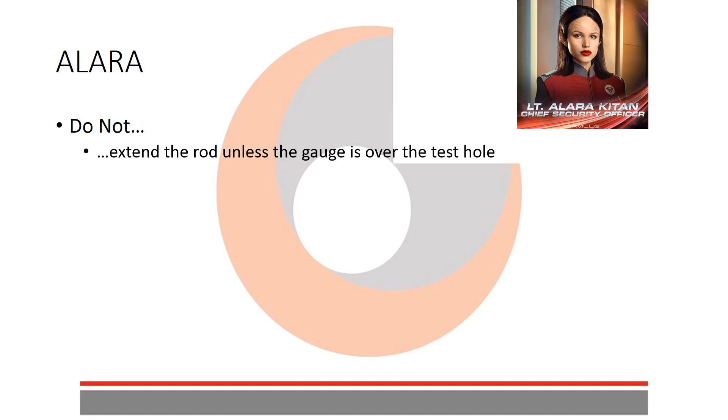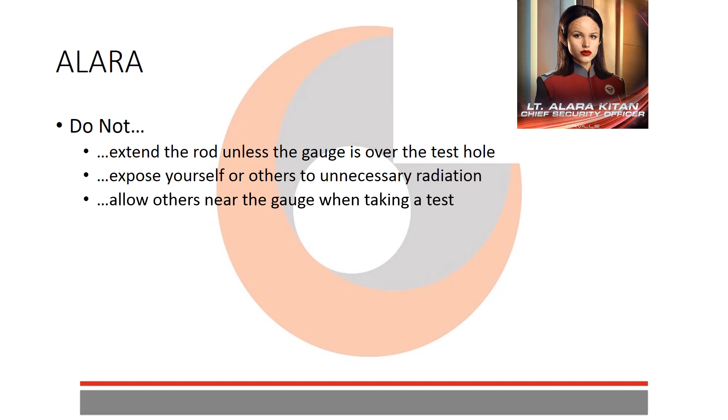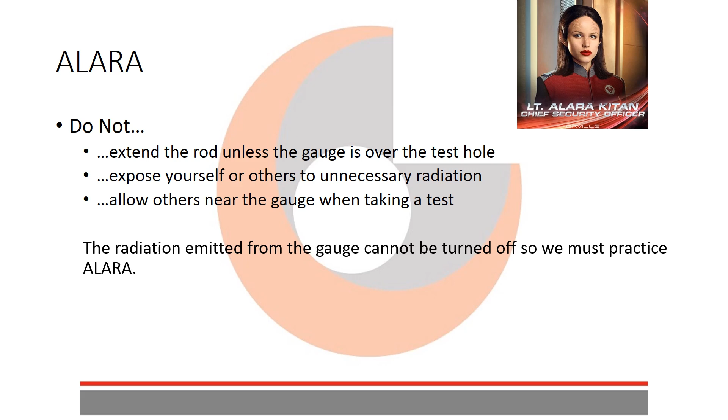Keeping in mind the concepts of ALARA, things you do not want to do are extend the rod unless the gauge is over the test hole. We don't want the rod outside the shielded area unless it's going directly into the ground. You do not want to expose yourself or others to unnecessary radiation, and you do not want to allow others near the gauge when taking a test. The radiation emitted from a gauge cannot be turned off, so we must practice ALARA. The best we can do is to keep the rod inside the gauge at all times when it's not actually taking a test. Again, ALARA has to do with time, distance, and shielding.

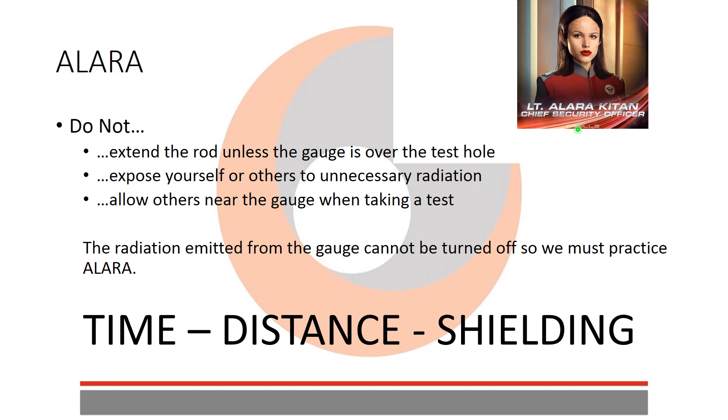Those of you familiar with the Orville television show, it's a picture of Lieutenant Alara Kitan, Chief Security Officer on the Orville.

Time. The less time a person remains in the area of radiation, the lower the radiation dose that person will receive. Work should be carried out quickly and efficiently, but with attention to safety.

Distance. The intensity of radiation and its effects fall off sharply as you move further away from the radioactive source. The dose rate decreases as the inverse square of the distance from the source. For example, by moving twice as far away from a radioactive source, you're exposed to only 1/4 the amount of radiation. Moving 3 times as far away means 1/9, and so on.

For instance, let's compare background radiation from cosmic radiation levels. At sea level, you'll receive about 30 millirems per year from cosmic radiation, and at 10,000 feet altitude, you'll receive approximately 140 millirems per year.

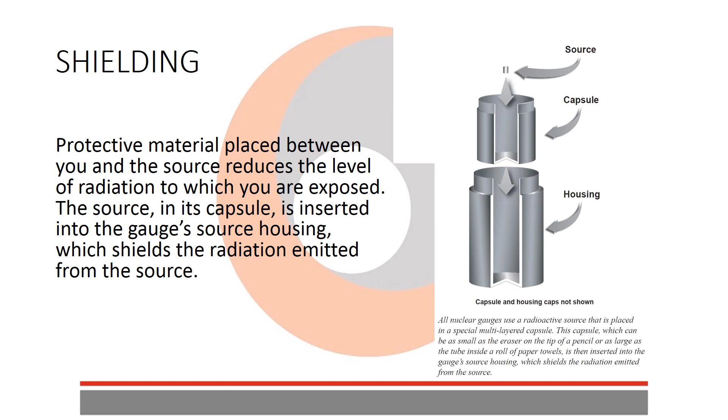Shielding. Shielding is a protective material placed between you and the source that reduces the level of radiation to which you are exposed. The source, in its capsule, is inserted into the gauge source housing, which shields the radiation emitted from the source. So you've got this little tiny source pellet, and it's put inside this capsule, and then the capsule is placed inside this housing, and that housing is actually welded to the end of the tip of the rod for the source that comes out of the gauge, and it's inside the housing for the source that stays inside the gauge.

Some sources of radiation, as we've already talked about, are solar radiation, nuclear medicine, and X-rays, of course. There are cosmic rays, which contribute to radiation. Radon is another contributor to radiation. Actually, as humans, we give off a small amount of radiation. Other sources of radiation are nuclear power plants, different types of foods and drinks. There's terrestrial radiation, radioactive waste, and a variety of consumer products can all be considered radioactive sources.

Let's talk about radiation dose limits. The general public is allowed 100 millirems per year over background. Once they are trained through the 8-hour course that Troxler gives, or APNGA, or Bruce Peterson, or something similar, then they are allowed 5,000 millirems per year. And you, as an adult radiation worker, are allowed 5,000 millirems per year. Minor radiation workers are allowed 500 millirems per year, as well as a fetus is also allowed 500 millirems per gestation period. So if a woman becomes pregnant, that fetus is allowed up to 500 millirems during that gestation period.

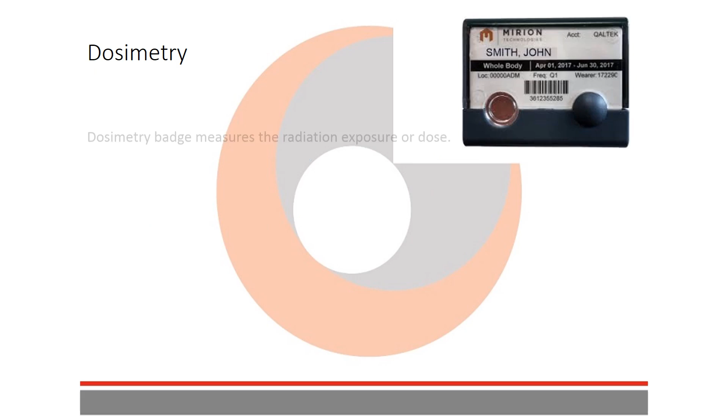Dosimetry badges. Up here in the top right hand corner, we've got a photograph of a dosimetry badge. It's from QALTEK, which is where we're getting ours currently, and they get these from Mirion. So the dosimetry badge measures the radiation exposure or dose.

There will be quarterly dose reports posted near the gauge storage area or another place designated by your local RSO. We keep ours right on the door to the gauge storage facility. The report shows the dose for the previous quarter as well as the annual to date and your lifetime exposure.

If you're ever going to leave MTI, you should request a lifetime dosage report so that you can provide that to your next employer if you're going to be working around radiation. And if you're new to MTI, you should be bringing one of these with you if you have previously worked around radiation.

MTI requires that your badge be worn at all times when transporting, working on, working around, or using a nuclear density gauge. Only wear the badge assigned to you by the local RSO, don't wear somebody else's badge, because if it comes back showing an overexposure, we won't know which person that overexposure belongs to.

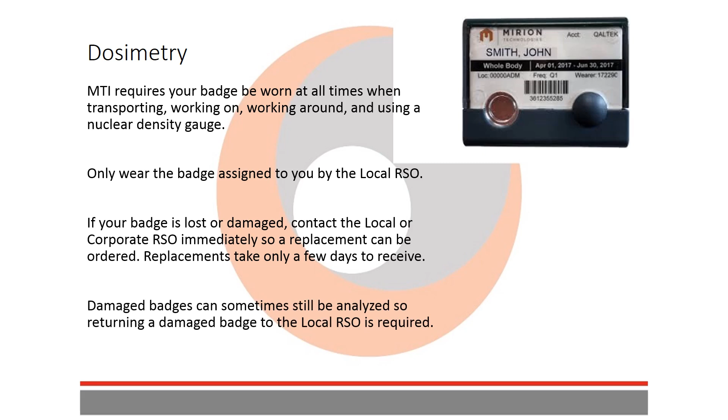While you're wearing it, you don't want to stop near any electromagnetic or radiation emitting sources, of course excluding nuclear density gauges, because that's what we're there to check. And you also don't want to wear them into a medical or dental facility because they could be doing x-rays, and that will affect the exposure.

Lastly, you don't want to leave it on the dashboard of your vehicle. A lot of times that extreme heat can cause some really bizarre readings on those. We've seen them come back extremely high because of that. So don't leave those on the dashboard of your vehicle, or really anywhere where it's going to be getting really hot or in the sun for an extended period of time.

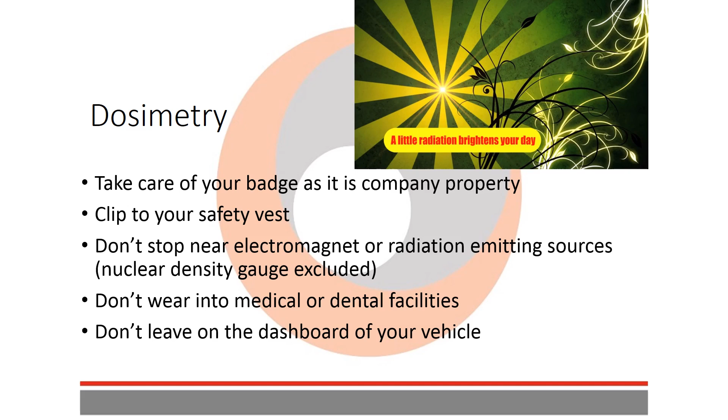More on dosimetry. We've got radioactive man over here on the right. In the case that a badge shows an overexposure, the local RSO is going to interview the gauge user, and together they will fill out a report indicating how that overexposure occurred.

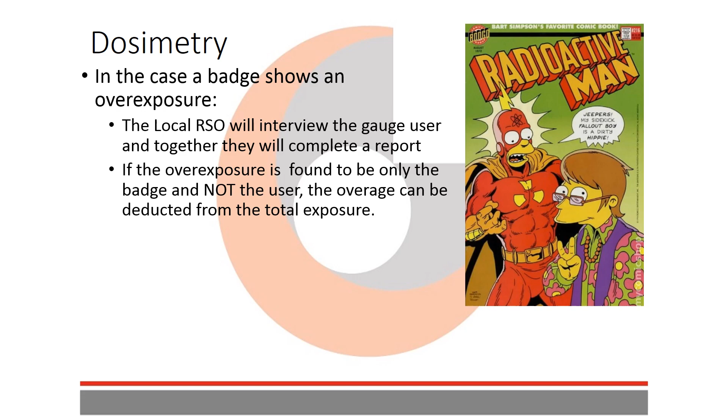If the overexposure is found to be only the badge and not necessarily the user, that overage can be deducted from your total exposure. As a trained radiation worker, you're allowed 5,000 millirems per year. It is possible the overexposure can result in an annual or lifetime dose being exceeded. In that case, the user may not work around radiation any longer.

One quick story about the previous bullet item. George DuPont used to tell this story. It's sort of legend now, but a guy was going on an extended leave. He was going to be gone about a month. As he's putting his gauge away for the last time, his badge comes off of his shirt and falls into the case.

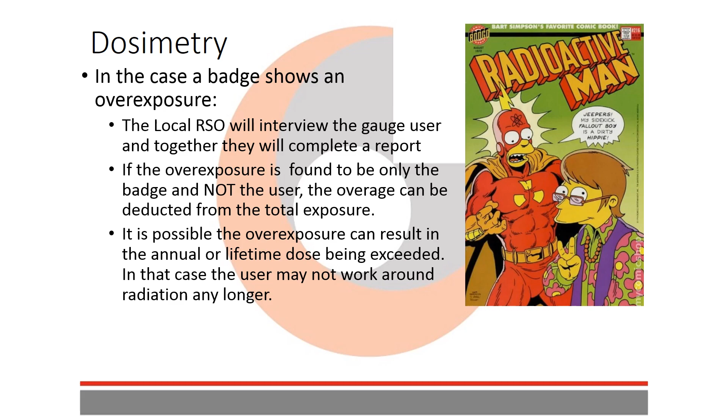It's stored in the case for about a month until he comes back, goes back to work, and lo and behold, he finds his badge in the case. It's been in there for a month, and it was highly overexposed, and they were able to figure out that that was the case. They wrote a letter to Mirion and had the majority of that exposure deducted from his annual and his lifetime dose.

Gauge storage, transportation, and use. Got some more radioactive man over here on the right. Transportation, use, and storage. MTI requirements are radiation safety training certificate from an approved source like APNGA, Troxler, or BHP.

I think the one that we like the most is Troxler. I feel like they give the best training for the amount of time that's spent there. And BHP is Bruce Peterson. I don't know if he's giving classes anymore or not, but that is possible.

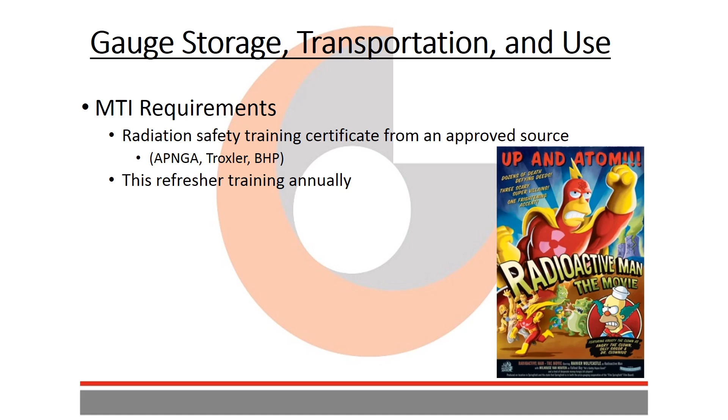MTI also requires that you go through this refresher training annually. So next year you'll get to watch this approximately 1 hour video again.

You have to complete the hazmat test annually. The requirement from the DOT is that it's done every 3 years, but because that time frame is difficult to track, we just do it annually. It's a quick and fairly easy test—I'd actually call it more of a quiz.

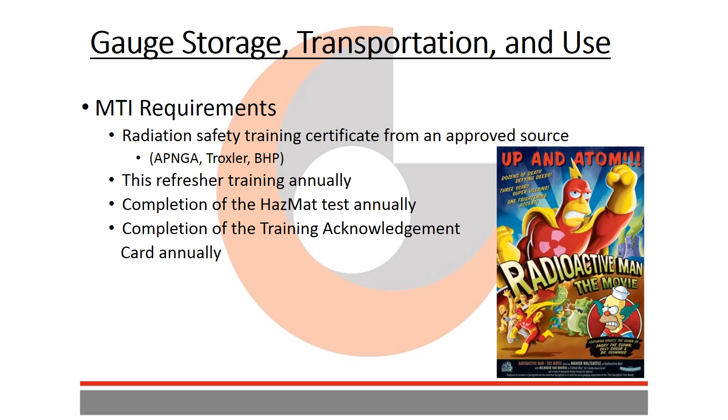You'll fill out a training acknowledgement card that essentially says you agree that you've been trained, taken a test, been through this refresher training, and know all there is to know about radiation. You will also need a gauge operator wallet card, which we now issue via email as a PDF, so instead of printing it and keeping it in your wallet, those of you using an iPad in the field can just keep it there in case someone asks to see it.

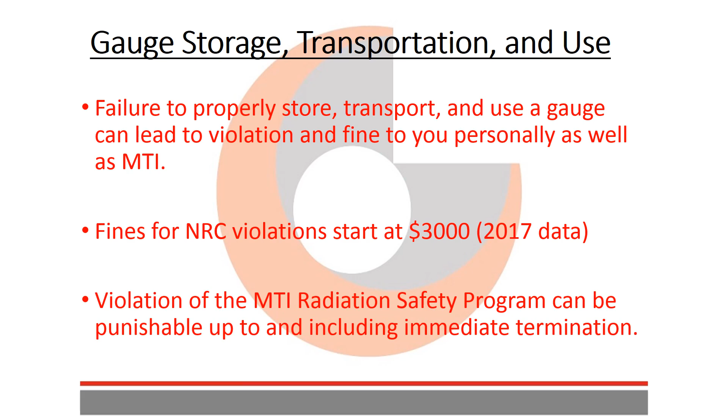Failure to properly store, transport, and use a gauge can lead to violation and fines to you personally as well as to MTI. Fines for NRC violations start at $3,000 as of 2017 data. Violation of the MTI radiation safety program can be punishable up to and including immediate termination.

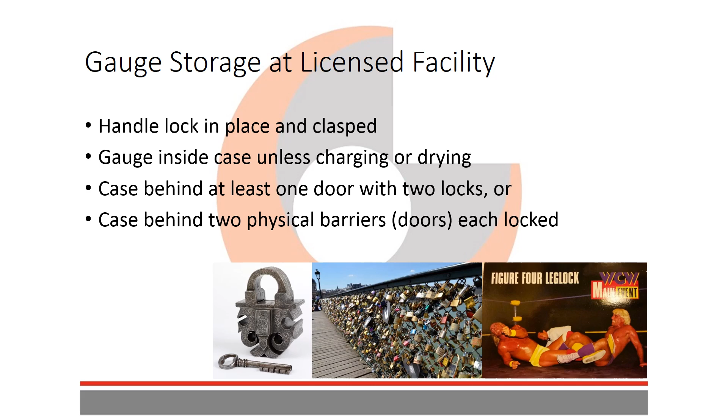The gauge must be inside the case unless it's charging or drying. The case needs to be behind at least one door with 2 locks, or behind 2 physical barriers, such as doors, each locked independently. MTI also has continuous recording cameras at each licensed facility to monitor in case of theft.

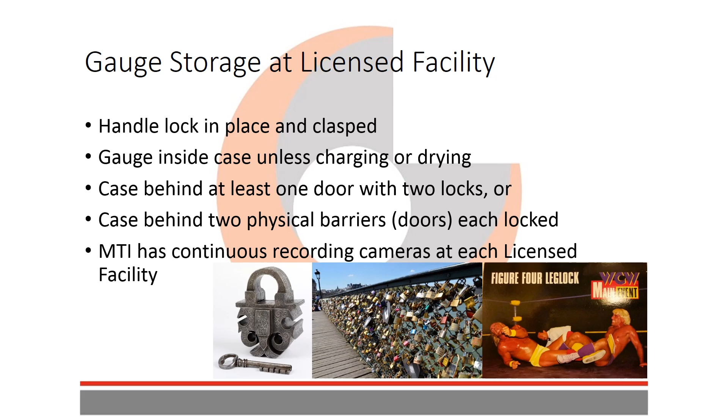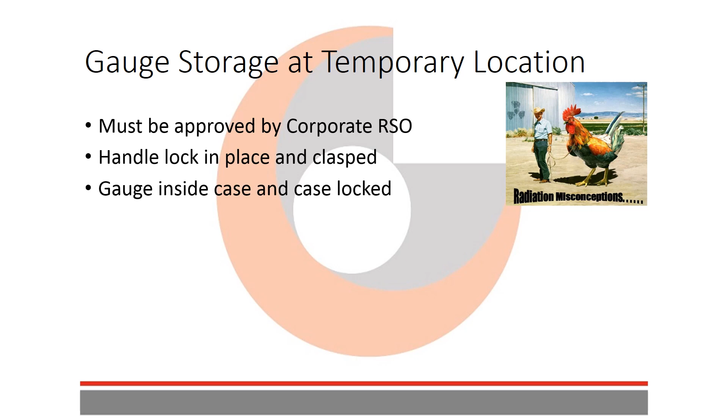Storing a gauge at a temporary location must be approved by the corporate RSO. The handle lock must be in place and clasped, and the gauge must be inside the case with the case locked. The case needs to be stored inside a locked or secured building, or inside a non-portable container such as a land-sea container—also known as a connex—or a job box chained to the axle of the job trailer. The case needs to be locked to a permanent fixture inside the building or non-portable container. Signage requirements are the same as for a licensed facility, so a sign indicating a radiation area must be posted.

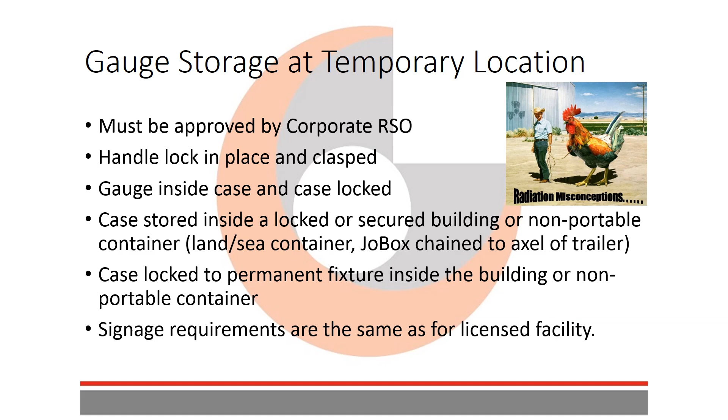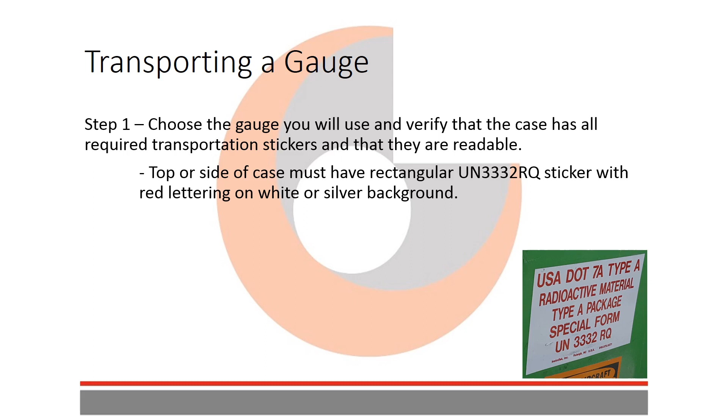There are several steps for transporting a gauge. Step 1: choose the gauge you'll use and verify that the case has all the required transportation stickers and that they are all readable. One required sticker on the top or side of the case is the rectangular UN3332 RQ sticker with red lettering on a white or silver background, as displayed here. Again, this must be on the top or one of the sides of the case.

The other required sticker, on both sides of the case, is the yellow and white diamond-shaped radioactive 2 sticker with readable source nuclides, activity, and TI. Again, we need to make sure this information is readable.

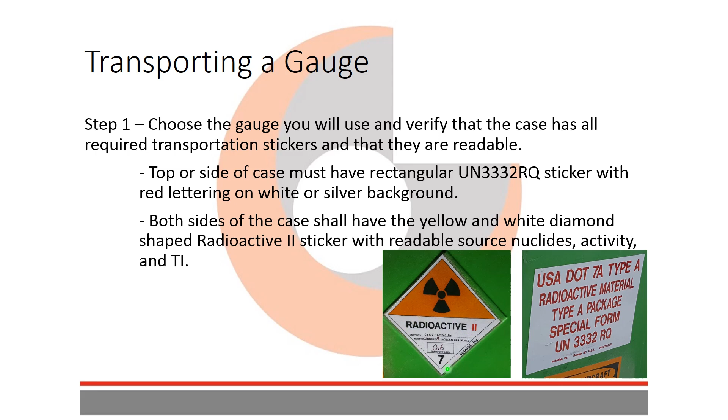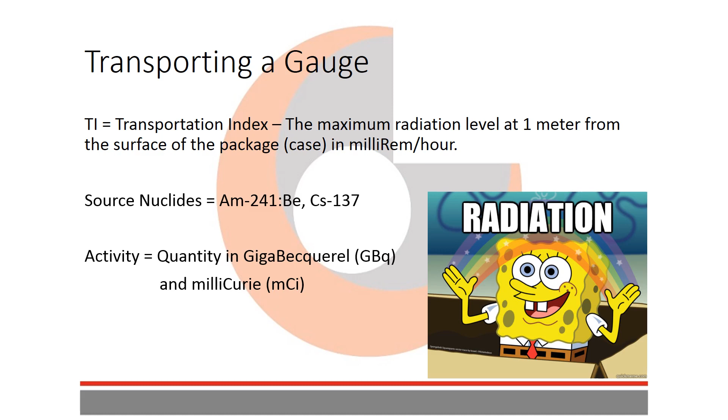The Transportation Index, or TI, is the maximum radiation level at 1 meter from the surface of the package—in this case, the storage case for the gauge—recorded in millirems per hour. The source nuclides for these gauges are americium-241 beryllium and cesium-137. The activity is the quantity in gigabecquerels and millicuries, and on the diamond-shaped sticker it must be listed in both units.

Step 2 for transporting a gauge is to be sure the gauge is charged and in good working order and that all the tools are accounted for. Also verify that the handle lock is present and clasped.

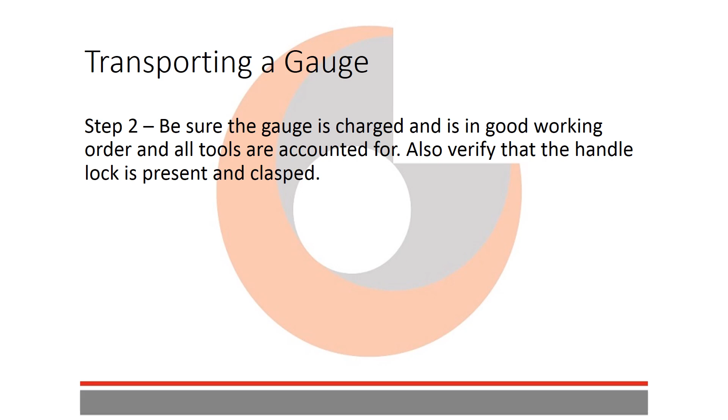Step 3 when using a gauge is to make sure you use the gauge-specific utilization log. Note the date and time within 5 minutes, the user's name, and the destination. If the gauge is going to be used on a single job that day, name that job site. If it's going to be in a variety of locations, give a general description, like the towns it'll be in.

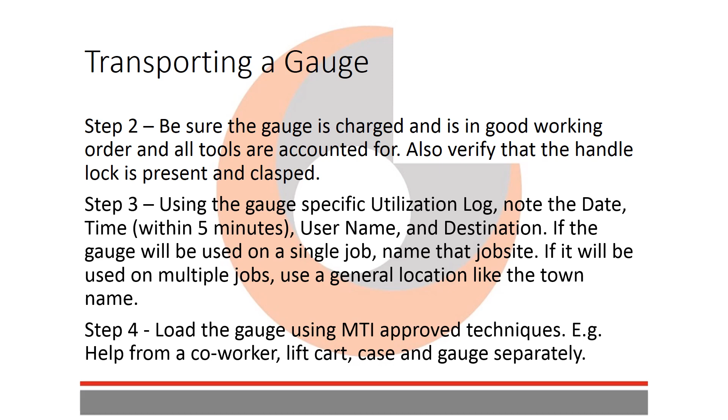Step 4 is to load the gauge using MTI-approved techniques, such as getting help from a coworker, sliding it on and off of a lift cart, and moving the case and gauge separately. On a loadout, you would leave the gauge in the storage room, put the case into the vehicle, then go get the gauge, place it back in the case, and lock it up.

Step 5, we're going to use 2 chains or cables.

So those of you that aren't aware, this rapper's name is 2 Chainz, and this comic book character's name is Cable. You need to use him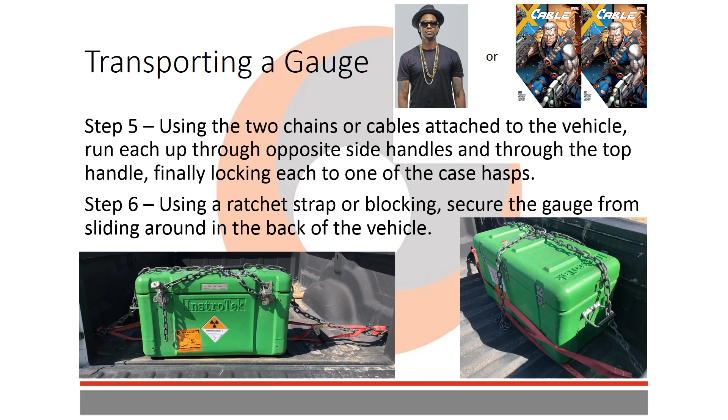At that point, you're going to use the ratchet strap to tighten this up against the tailgate so that that case can't be moving anywhere during transportation. And then this is a side view of the same thing.

Step 7, take the gauge binder. And that's going to include the bill of lading, which is your transportation papers, and you want to place that within arm's reach of the driver and on top of any other items in the vehicle. It can also be placed in the door pocket on the driver's side. That seems to be a pretty good place to put it.

If you've got a bunch of stuff in the passenger seat or the floorboard on the passenger side, you just want to make sure that gauge binder is on the top of that pile. Do not put the gauge binder on the dashboard because that can impair your vision and keep you from seeing what's coming at you. Step 8 is to drive defensively. You've got to watch out for those other motorists out there.

I also wanted to mention that non-trained personnel are not allowed in the vehicle during transportation. So if you're going to take other people besides yourself, and you also need to transport a gauge, those people need to also be radiation safety trained.

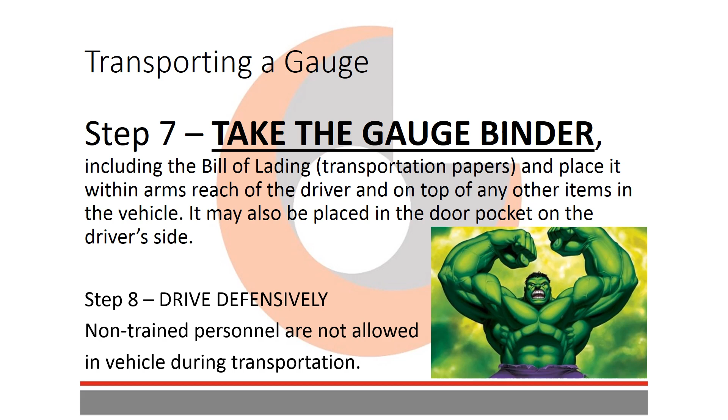If you're going to leave a gauge in your vehicle and be parked somewhere, like you're going to go in to the McDonald's for lunch or something, you want to try to park where you can have line of sight with your vehicle. Make sure that you're able to see the vehicle in case someone walks up to it and starts checking out your gauge and seeing what's in there and possibly trying to steal it.

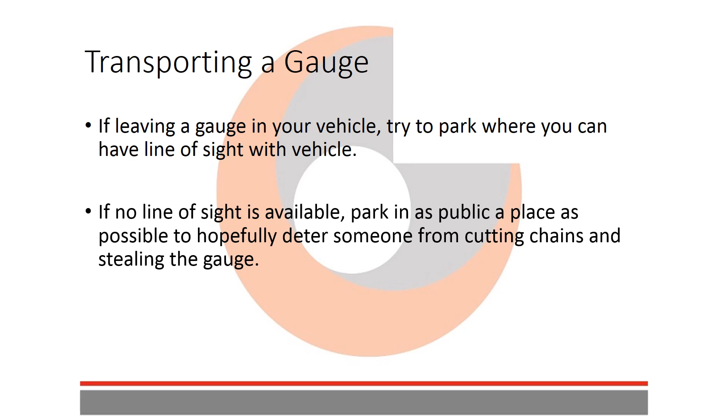So if no line of sight is available, you want to park in as public a place as possible in hopes to deter someone from cutting those chains or cables and stealing the gauge.

Next, we're going to go over the contents of the gauge binder. And actually, to start with, we're going to talk about that outside pocket with the clear cover on it. That outside pocket is going to have a laminated gauge-specific bill of lading and emergency procedures back to back in there. So we'll laminate those two items back to back and slide it into that outside clear pocket of the gauge binder.

The next thing inside, page 1, is the gauge-specific bill of lading one more time. So there's going to be 2 of those with the binder, and there's also going to be 2 of the emergency procedures. So page 1, gauge-specific bill of lading. Page 2 is the emergency procedures.

And we're going to go over the remaining contents of the gauge binder. Not really in any specific order of how they go in, but we are going to need a copy of the NRC or the state-issued radioactive materials license. Those of you in Washington will need to carry a Washington license. Those of you in Oregon need to carry an Oregon license. And those of you in Idaho will need to carry the NRC license.

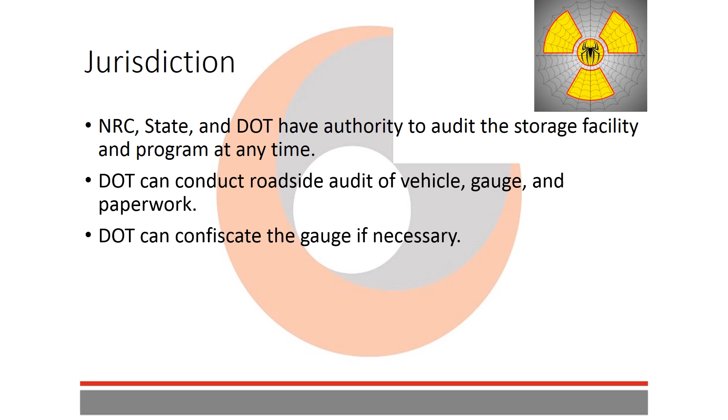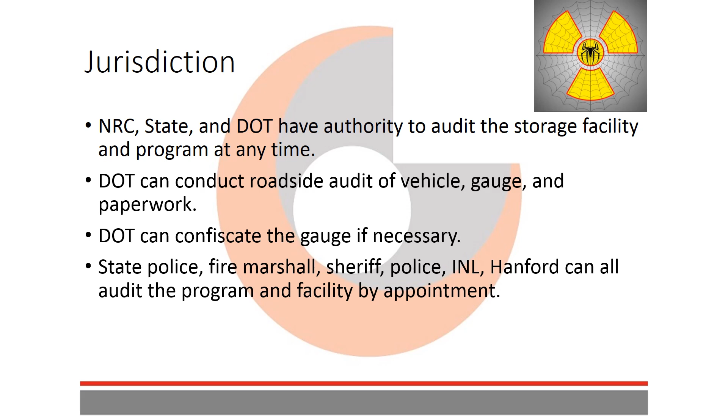Next, we're going to cover jurisdiction. The NRC, state, or the DOT have the authority to audit the storage facility and the program at any time. The DOT can conduct roadside audits of the vehicle, the gauge, and your paperwork. The DOT can also confiscate the gauge if necessary, and they could do this in the case that you don't have proper transportation papers. State police, fire marshal, sheriff, police, the INL, and Hanford site can all audit the program and facility by appointment.

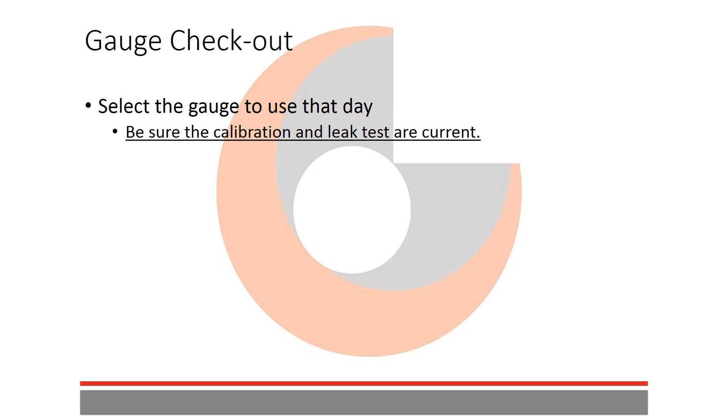To check out a gauge, the first thing you'll want to do is select the gauge to use that day. You'll want to be sure the calibration and leak test are current. If you're going to be testing asphalt, you'll want to check and see if the gauge has been correlated to the asphalt mix design used on the project that day. If it is not correlated, but there is another gauge that is, you may want to take the gauge that is correlated instead.

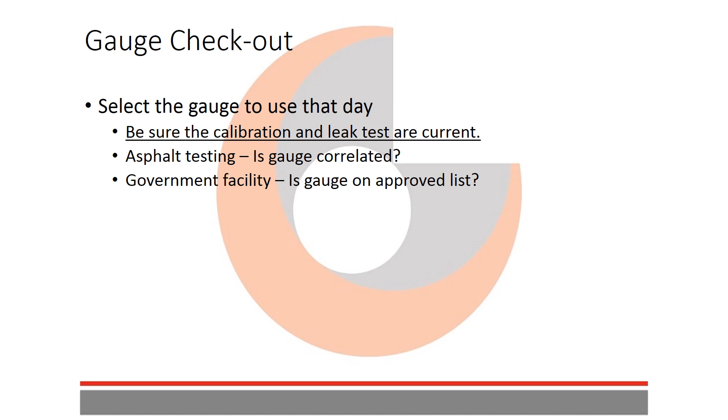If you're going to be traveling with the gauge to a government facility, you'll want to make sure that the gauge is on an approved list. For instance, here in Boise, we transport gauges to the Mountain Home Air Force Base on a fairly regular basis. There are 3 gauges that are on the approved list, and that list has been approved by the Mountain Home Air Force Base Radiation Safety Officer.

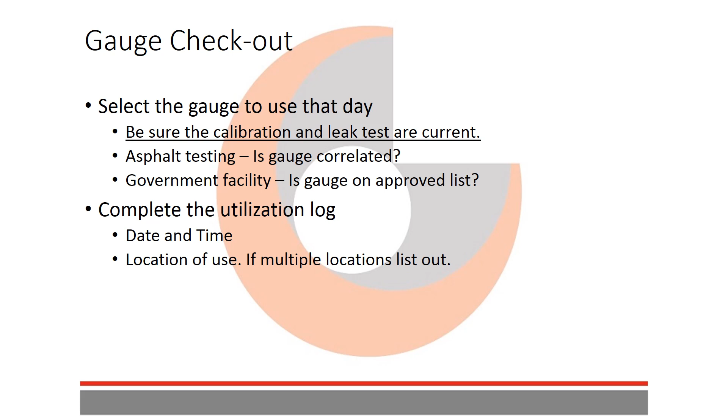The next thing you'll do is complete the utilization log, and we spoke about this before, where you're going to include the date and the time within that 5-minute time period. Location of the use, and if it's multiple locations, go ahead and list those out or give some general information about those locations, like the town or the towns that you'll be using it in. Next, you'll want to load and transport as previously described. On a lifting reminder, your 3 options there are to get help, use a cart to slide the gauge on and off of, or you can remove the gauge from the case and take them to the vehicle separately.

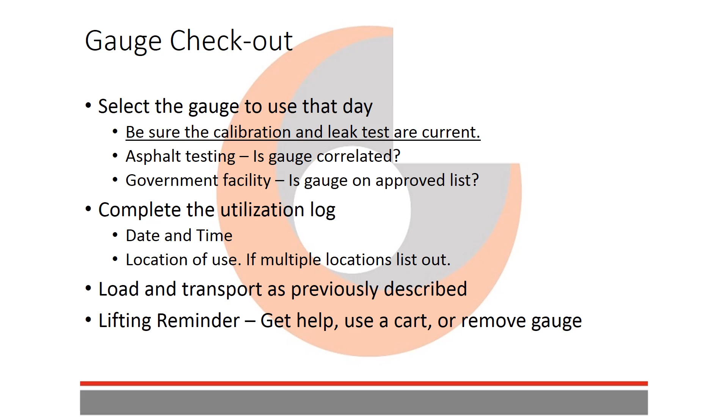Gauge use safety. You'll want to make sure that when you're taking a test, you're keeping others at least 20 feet away from the gauge. If they won't stay back 20 feet, go ahead and pack up the gauge and lock it in the vehicle and let them know that once they back off and let you do your work, that you'll get back to work. Never leave the gauge unattended. You want to stay within 10 feet if it is not locked and secured in the transport case. So if you're on a job site, don't turn your back to the gauge, don't walk away from it. You need to stay within that 10 feet, and sometimes closer depending on the situation. If there's a lot of heavy equipment running around, staying closer than the 10 feet radius is a better idea so that you can grab that gauge and get out of there with it if you need to.

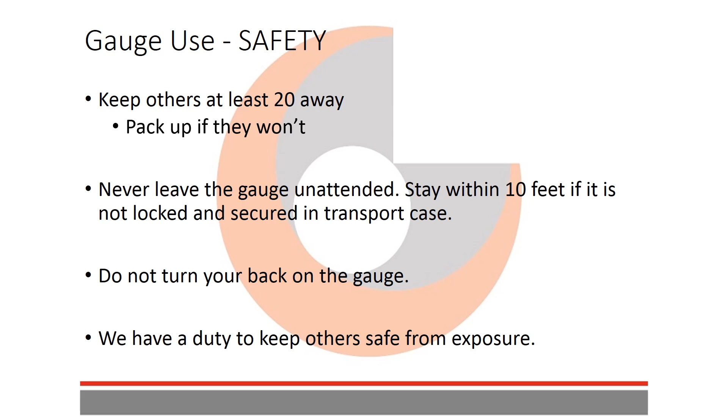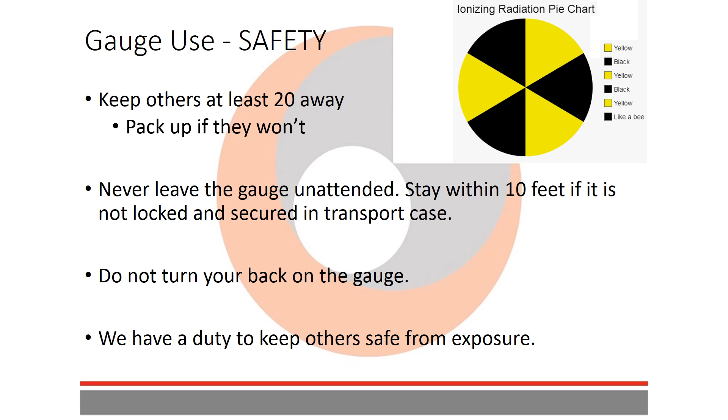Do not turn your back on the gauge. It's not going to get you, something else might get it. So we don't want it to get run over, we don't want it to get stolen, and also we don't want another user to come and take it from you. We have a duty to keep others safe from exposure. Here's your fancy ionizing radiation pie chart. The radiation emitted by the gauges is ionizing radiation. So we've got yellow, black, and yellow like a bee. So there you go.

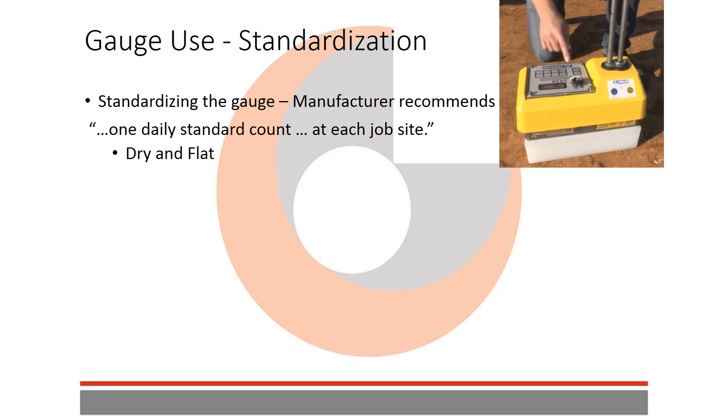As far as standardization, standardize the gauge using the manufacturer recommendations, and they recommend one daily standard count and also at each job site. So if you're only on one job site, one standard count. At multiple job sites, you'll do multiple standard counts. You'll want to make sure that when you standardize the gauge, you're on a dry and flat area. You want it at least 10 feet from any large vertical surfaces like a wall or a vehicle or a big water tank or something along those lines. You want to make sure you're at least 33 feet from other radioactive sources. 33 feet also is approximately 10 meters.

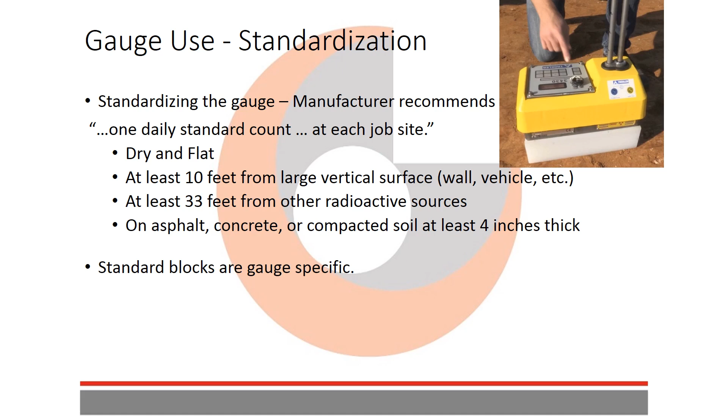You want to make sure that you're doing the standard count on asphalt, concrete, or compacted soil that is at least 4 inches thick. These standard blocks for these gauges are gauge specific, so be sure that you're using the standard block for the appropriate gauge. Redo the standard count if the faceplate is disconnected from the gauge, the battery pack is disconnected, or you have odd test results that keep coming up.

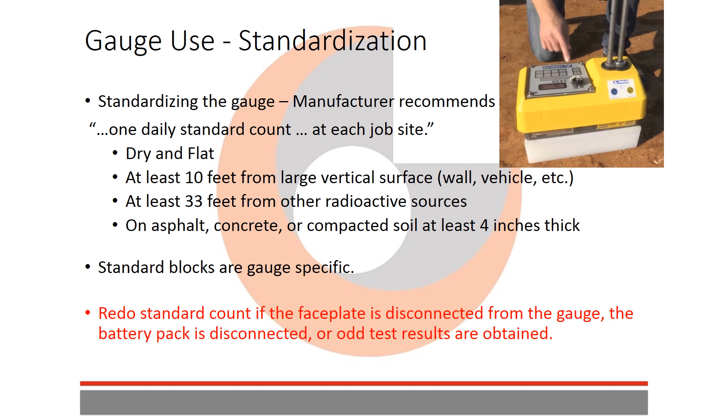You'll want to record the standard count results in the gauge-specific standard count log and verify that the results are within the required range based on the previous 4 standard count results. This is an ASTM requirement and it's also an AASHTO requirement, so these are things that we need to do.

AMRL or the AASHTO resource will be looking for those types of records when they come, and also the NRC or your state programs may be looking for those records as well. When those standard count logs get filled up, you'll want to be sure you deliver those to the office RSO so they can scan those and upload them to the server.

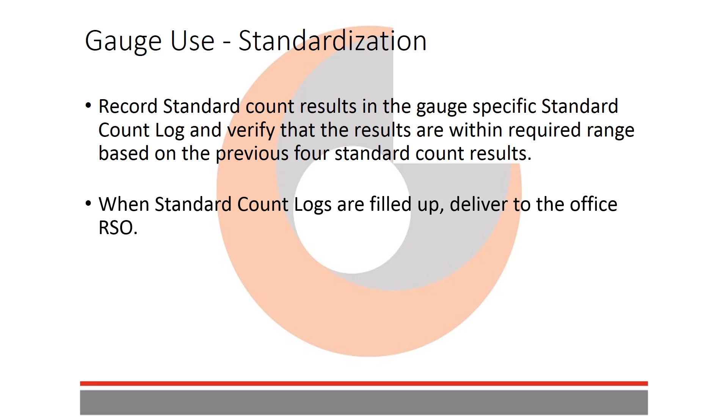The next thing you need to do is validate your calculations for the standard counts, both the moisture and the density count for soil. So your density standard needs to be within 1% of the average of the previous 4 standard counts. So you take the average of the previous 4 and make sure that your new standard count is within 1% of that average. The moisture standard needs to be within 2% of the average of the previous 4 standard counts.

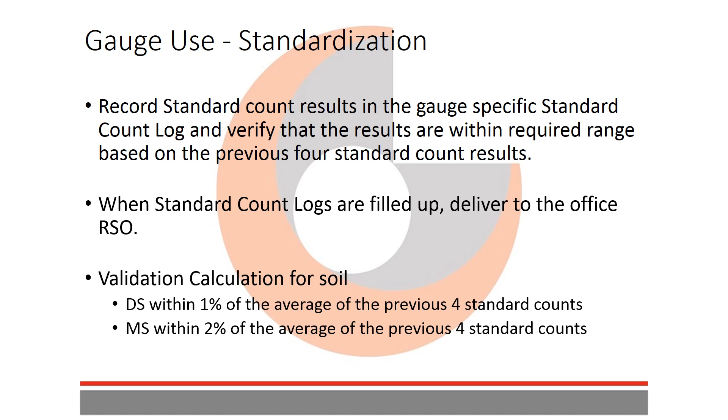The validation calculation for asphalt is this little beauty here. It's a little more difficult. I just copied this right out of the ASTM, and essentially you're taking the current standard count and subtracting the average of the past 4, and that needs to be less than or equal to 2 times the square root of the average of the past 4 divided by the value of any prescale. And that prescale value is something that's given by the manufacturer for each gauge.

We do have a spreadsheet to do that validation of the standard counts for both soil and asphalt, and the prescale factors are in there. It does all of this automatically. All you need to do is put the previous 4 standard count information in and also the current standard count information, and it will tell you whether it passes and is validated or not.

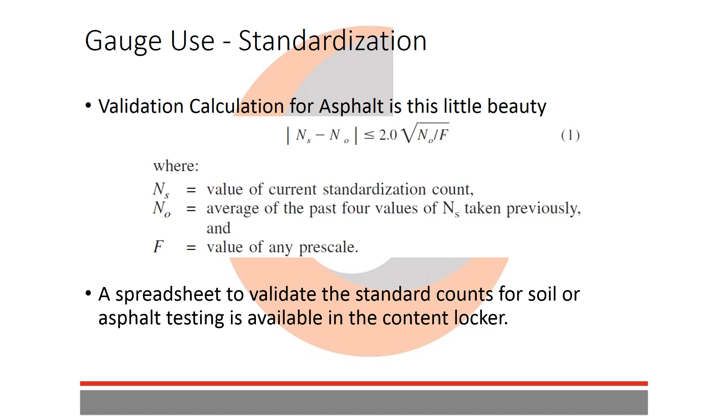So when you're taking a test, the handle lock should be engaged when it's not in use. So as you're hiking from spot to spot, if you're going a ways, you may want to go ahead and put the handle lock on in between tests. You need to keep the gauge locked in the transportation case when it's not in use. So if you're going to have lunch or sit down and write a report or something along those lines, you'll want to make sure that you lock that gauge in the case and make sure that the case is appropriately locked into the vehicle.

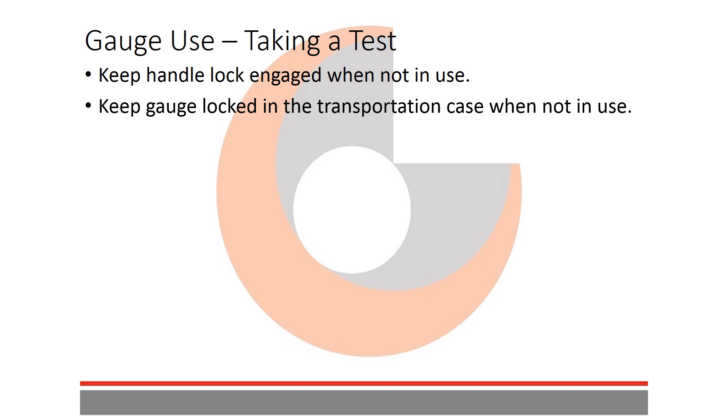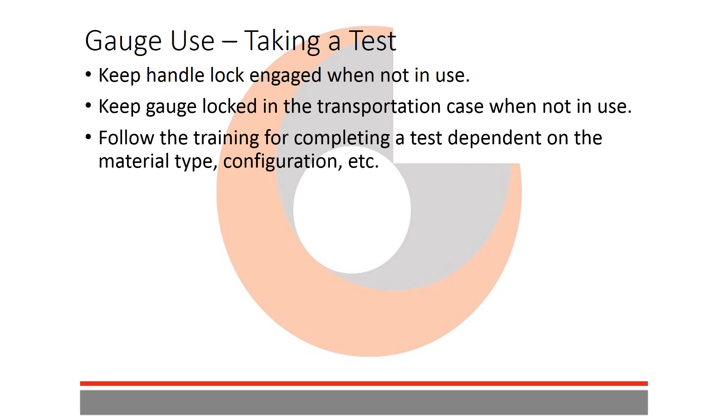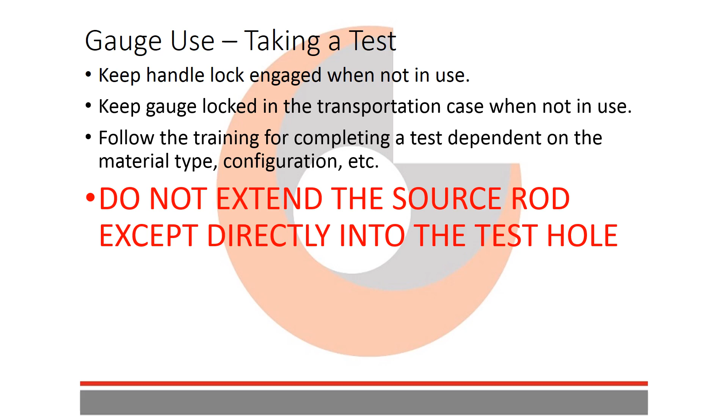You'll want to follow the training for completing a test dependent on the material type and configuration. So the training that we will have received for actual gauge use, taking a test, is what you should depend on in this situation. Do not extend the source rod except directly into the test hole. We talked about this earlier, and we want to make sure that the gauge is sitting flat on the ground when the source rod is extended. Don't do that. Don't do that. Don't do that. And don't do that.

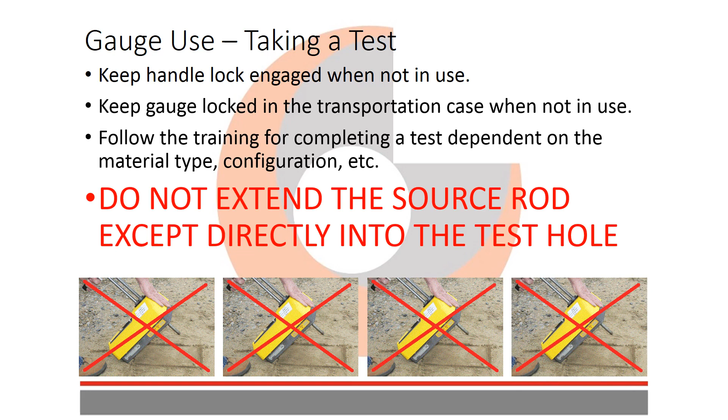To check a gauge in, so now you've been out to the field with the gauge, you've transported it back appropriately locked into the vehicle. Again, here's your lifting reminder. You get some help from a coworker. Use a cart to slide the gauge on and off, or you can remove the gauge from the case, take it into the storage facility, and then go back out to the vehicle and retrieve the case.

You'll complete the utilization log by this time writing down the time that the gauge was turned in, and you'll be sure that all the locks and doors are properly latched. So the lock on the handle of the gauge, the locks on the case, the locks on the doors to the storage facility, whether it be a cabinet or a room. You want to make sure everything is all locked up and properly latched. We've seen locked doors before that were not actually latched, and that is a problem.

Emergency procedures. The first thing you'll want to do in case of emergency is see the MTI gauge emergency response information. It's on the back of that laminated card slipped into the front pocket of the binder. It should also be page 2 in the gauge binder, and that will cover any emergency procedures in case you need it.

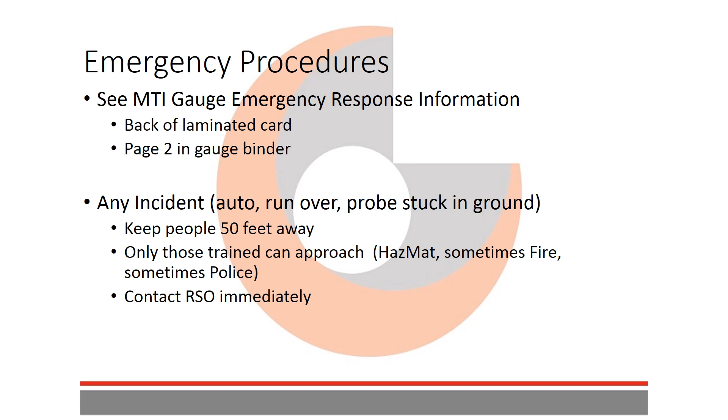Keep people out of there. You'll want to contact the RSO as soon as possible, and the RSO will respond with a survey meter. Any excessive readings may cause a call to hazmat response. If there are no excessive readings, the gauge can be transported to the storage facility and quarantined until the RSO performs a leak test and those results are back, reviewed, and within the limits of the leak requirements.

At that point, we'll need to determine any course of action. If there's a leak, it may have to be disposed of in the proper way. All of that will be done by your RSO, and the gauge will likely need to be sent in for calibration, possibly repair. If the RSO does not respond to your phone call, contact the Troxler emergency line. The phone number is on the emergency response information card.

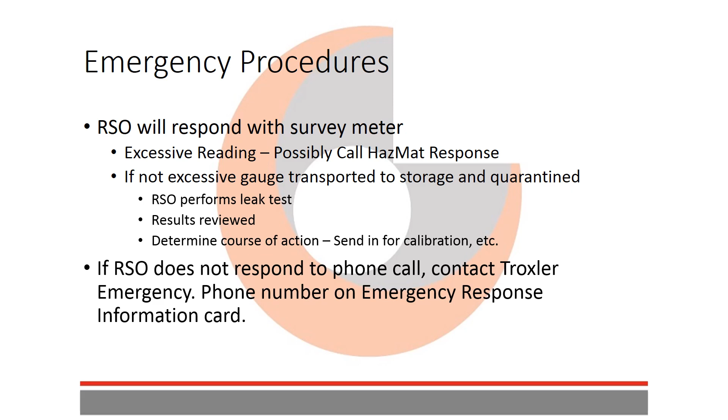So we'll talk about radiation theory here for a few minutes. I wanted to go over non-ionizing radiation, which is radiation that doesn't have sufficient energy to dislodge orbital electrons, so it does not have the ability to change any makeup of the cells in your body. Some examples would be microwaves, ultraviolet light, most lasers, radio waves, infrared light, and radar.

Now ionizing radiation, on the other hand, is what we're using when we're testing the soil, moisture, asphalt, and in some cases concrete. That radiation has sufficient energy to dislodge orbital electrons and actually change the cell structure. Some examples of ionizing radiation are alpha particles, beta particles, neutrons, gamma rays, and X-rays.

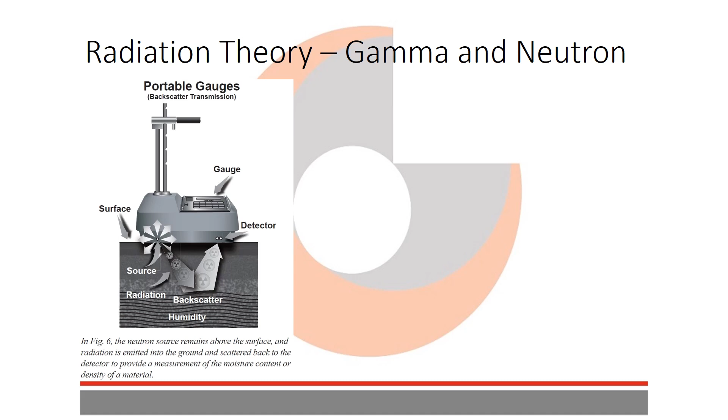More on radiation theory - we're going to talk specifically about gamma and neutron. Here's a portable gauge in backscatter transmission mode. You can see the neutron source remains above the surface, and radiation is emitted into the ground and scattered back to the detector to provide a measurement of the moisture content or density of a material. The neutron source is here, emitting radiation into the ground, which comes back to the detector and gives moisture and density information.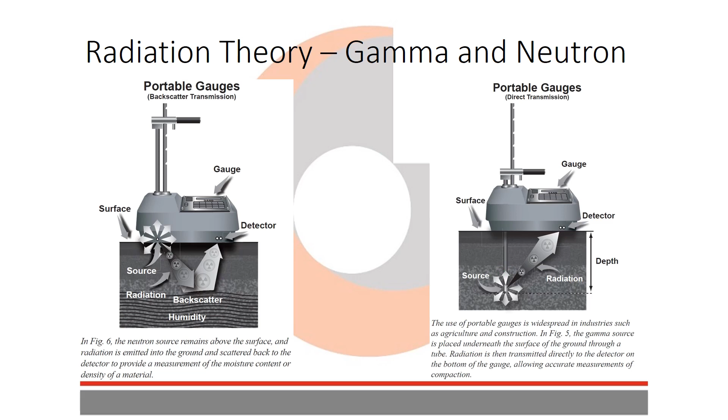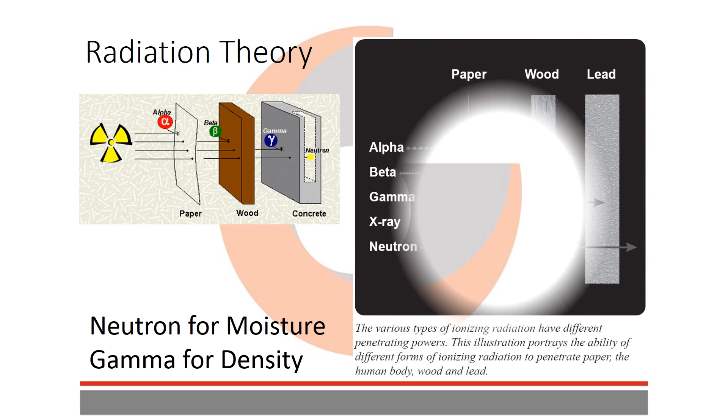One more look at the various types of ionizing radiation and their different penetrating powers. This illustration shows the ability of different forms of ionizing radiation to penetrate paper, the human body, wood, and lead. Alpha is stopped by paper, beta is stopped by your skin or hand. Gamma will go ahead and travel right on through the majority of this stuff and be stopped by the lead. X-ray goes right on through here and through the wood, but not much further than that. Neutron really just blasts through all of this stuff, and if the lead or concrete is thick enough, that will stop it.